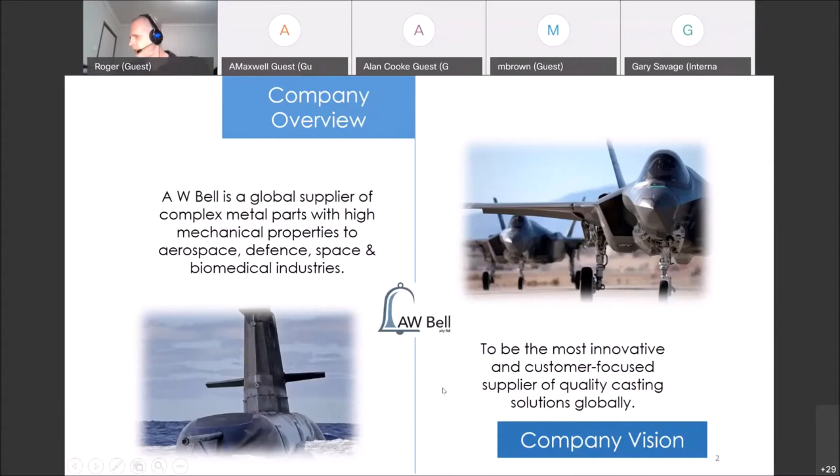So, on to today's presentation. What I'm going to talk to you about, and this is reasonably informal - basically, I'm going to tell you what we've done in this project. It was a very, very interesting project to do, something really quite new for us. At AW Bell we cast everything you can melt in air, so everything from all your non-ferrous materials: cobalt, nickel, cast irons, steels of every description you can possibly think of, but we'd never really looked at anything quite like Invar.

Today I'm going to talk to you about what CubeSats are and why they're important to us, thermal drift of sensors, and why do you choose Invar? Why is Invar important for satellites and for sensors?

I'll talk about the Invar effect, the scope of the project, give a brief overview of investment casting, just in case there's anyone in the audience who doesn't know what investment casting is, because I know this talk was advertised fairly widely. I'll talk a little bit about how thin, ten alloys that we looked at, and some of the reasons why we went down the path we did in looking at different wall thicknesses.

I'll talk about some of the issues we actually did find, especially related to hot tearing. It turns out that hot tearing was one of the major issues that we came up against. I'll show typical microstructures, talk about effect of alloying elements, fluidity testing, and then go on to what we actually did in

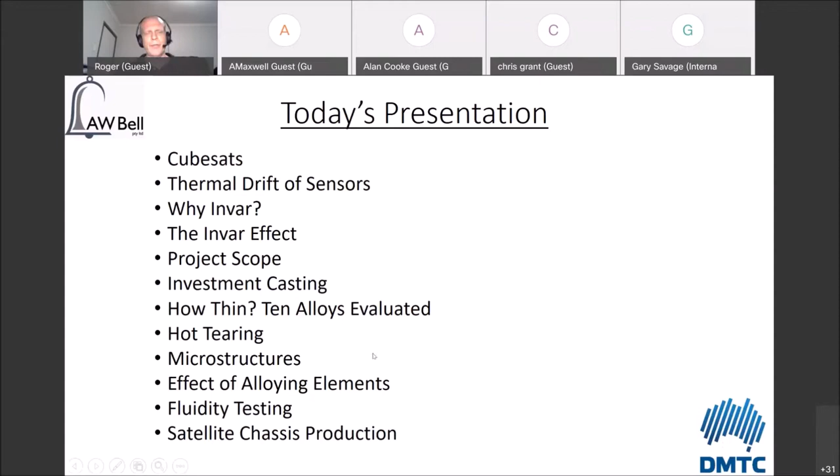the satellite chassis production. So cube satellites. Now, what a cube satellite is, it's defined as being of dimensions that are in multiples of 100 millimeters. So they're quite small. You know, basically you can hold up a ruler like this, a 30 centimeter ruler, 300 millimeter ruler.

That's basically the length dimension of most satellites or cube satellites, and then multiples of 100. So they're called cube satellites because they're cubes of 10 centimeters.

And quite typically, CubeSats can be employed either by themselves or they may be employed in constellations. If they are employed in constellations, it means that you've got a whole lot of them over a very large area, which creates an array. And that's very, very useful if you want to get a really, really good look at everything.

So the cost to build and launch a CubeSat is one of the big attractions to them. Generally, it's considered to be around about $20,000 to build and launch a Cube satellite. Most of that, of course, is associated with the launch part of it. The build of a Cube satellite is actually quite cheap.

With the technology that goes into Cube satellites really taking off at an exponential rate, the small satellite market, that is Cube satellites of around about the dimensions that I mentioned, have a market estimated around about $23 billion globally over the next 10 years. So it's a big emerging marketplace.

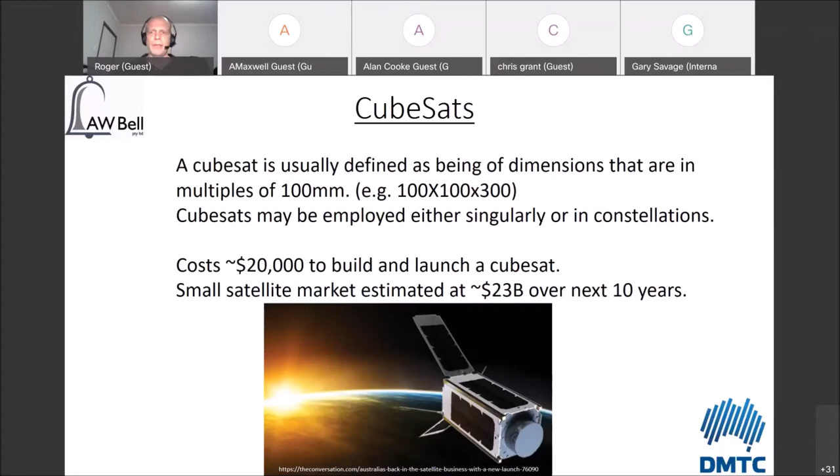And certainly there are a whole lot of different applications for them. We did this work under the Defence Materials Technology Centre because Australian Defence Force were interested in what opportunities might be available to them in looking at satellites, and very small satellites in particular.

So thermal drift of sensors in space is actually quite a significant issue, and it's actually a very, very big topic. I never really realised how much of a big issue it was until I started looking into it. And it really is the case that sensors require very high precision, or they have to be continually adjusted to account for changes in dimensions with temperature.

So the thermal drift is defined as the changes in normal operational behaviour of a device due to changes in ambient temperature. This thermal drift is caused by internal heating of equipment during normal operation or by changes in external ambient temperature.

And really what it comes down to is parts of a satellite face the sun, and they can be operating up around 150 degrees Celsius. Others are facing space, so they can be minus 150 degrees Celsius. It really depends on what the orbit of the satellite is.

Never realised how much of a satellite is actually a cooling system. It's actually quite substantial. So being able to overcome some of the issues with thermal drift means that you can go to these miniaturizations. So the cube satellite model, or what's also called nanosatellites, where you're sort of talking about even smaller, again, sort of this size.

One of the big advantages once you get to the very small sizes, as the price goes down, and you can therefore launch more of them into a constellation scenario.

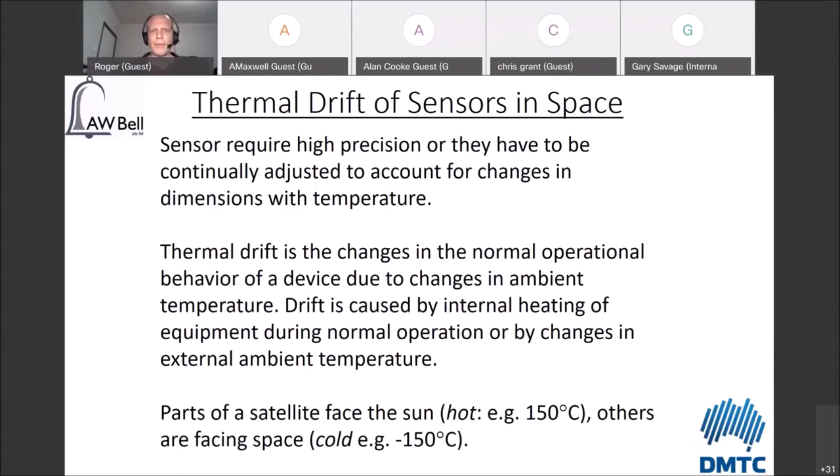So why Invar? Invar is a very, very interesting material. Invar is basically iron with 36% nickel. It has a minimal coefficient of thermal expansion over a very wide temperature range that minimises the thermal drift for sensors and components. Now, it was actually discovered,

invented in 1896 by Charles Edouard Guillaume at the International Bureau of Weights and Measures in Paris. Now, of course, history says that they found it on purpose because they were looking for something that had very, very low coefficient of thermal expansion. But of course, we all know that quite often invention and discovery are not necessarily the same thing.

But one of the things I found about it, even though the material has been around for quite some time, and it is becoming more important today for a range of different applications, the amount of information on actually casting Invar parts was very, very limited. I found continual references to a Metals Handbook from the 1948 edition.

I couldn't find a copy of it. I eventually found one I could buy that was an ex-library book, and it had a small amount of information from that time frame. There was also a small amount from Howmet, published in some Howmet publications in the mid-1980s, specific to investment casting. So there was an extremely small amount of information I could find.

There was some information I got from people I spoke to who had their own experiences with it, but they couldn't share written information with me because of the nature of the projects they worked on. Interestingly, today the major use of cast Invar is in carbon fibre tooling, especially for aerospace products.

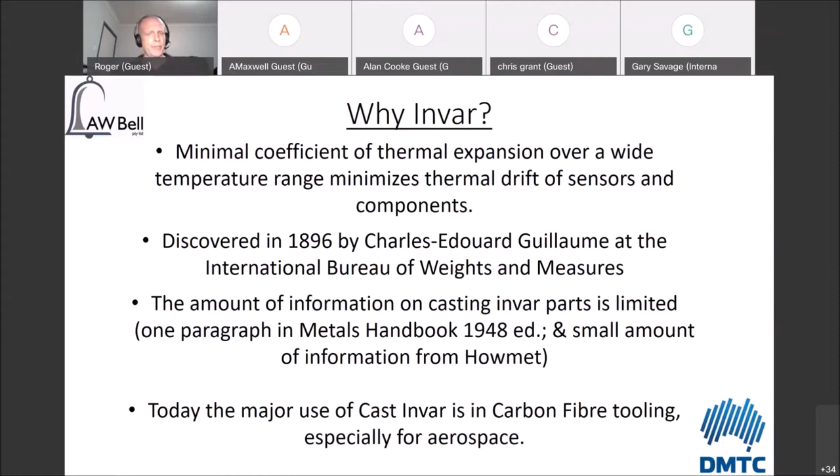This is a picture of machining of Invar for carbon fibre tooling, originating from Coast Composites Incorporated Tooling Division. Coast Composites manufacture wing sections for a vast array of commercial airliners, Boeing, Airbus, and companies all over the world. My understanding is that the big Invar foundries cast these very large pieces, which are then mounted onto a frame that is also Invar. They machine the shape of the wing piece out of it, and that becomes the carbon fibre tooling.

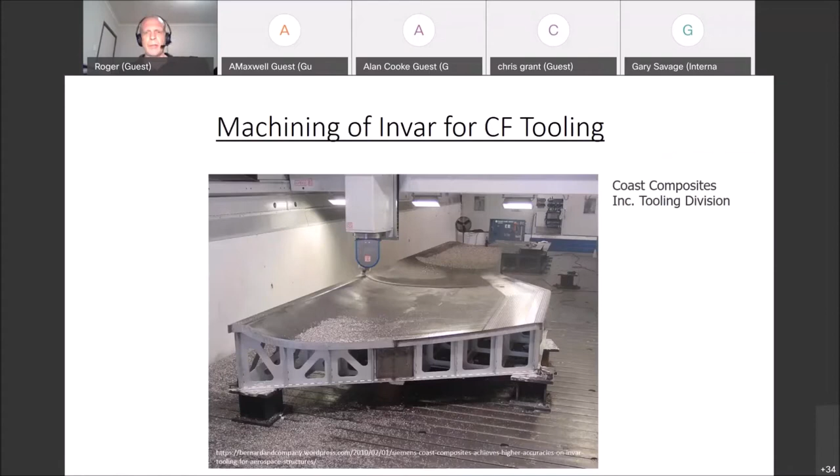The big importance of it is the fact that it doesn't move around with temperature, and that's why it's so desirable for tooling applications. So this puts it in context as to where most of the use of Invar has gone today, and as carbon fibre grows in aerospace, Invar use is growing as well. That's a little bit of an aside, not what I'm talking about, but I wanted to put in context where a lot of the technology currently resides. Boeing has their own specification for this kind of thing, which is a little different, which I'll talk about further on.

It's quite an extraordinary effect. On either side of 36% nickel, you have what tends towards normal coefficient of thermal expansion, but right at this particular concentration, and a little either side of it, you get very low coefficient of thermal expansion. This is more commonly termed the Invar effect. Some other materials display it, but nowhere near as significantly as the iron 36% nickel material.

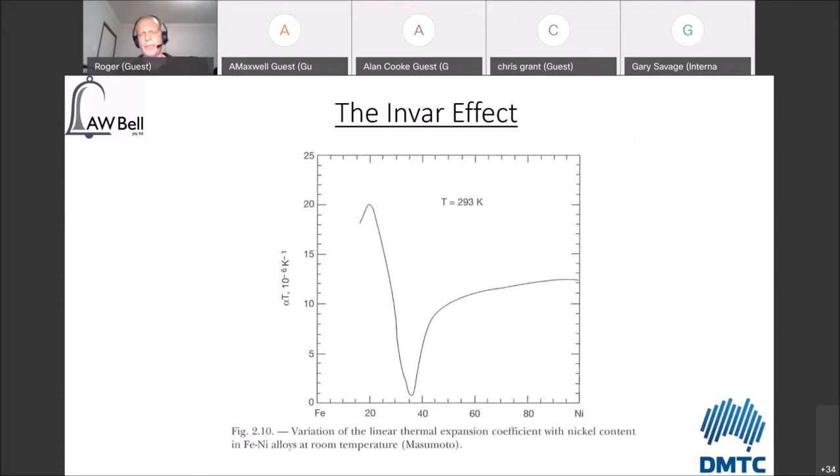So the project scope: this was part of project 11.62 for the high altitude sensor systems, and the greater project name was Advanced Manufacture of CubeSat Components. It was a collaboration between DMTC, who had oversight of what we were doing, University of New South Wales, who provided designs for the structures we built and some of the hardware that went inside, CSIRO, who were looking at 3D printing of some titanium parts which went internally into the structure, La Trobe University, and outside, AW Bell.

Our part of the project was to evaluate the feasibility of manufacturing thin wall Invar from investment castings. We assessed alloys based on their castability, coefficient of thermal expansion, and propensity to form defects, with a particular focus on optimizing the thermal expansion over the temperature range of -150 to +150 Celsius, making it suitable for satellite components.

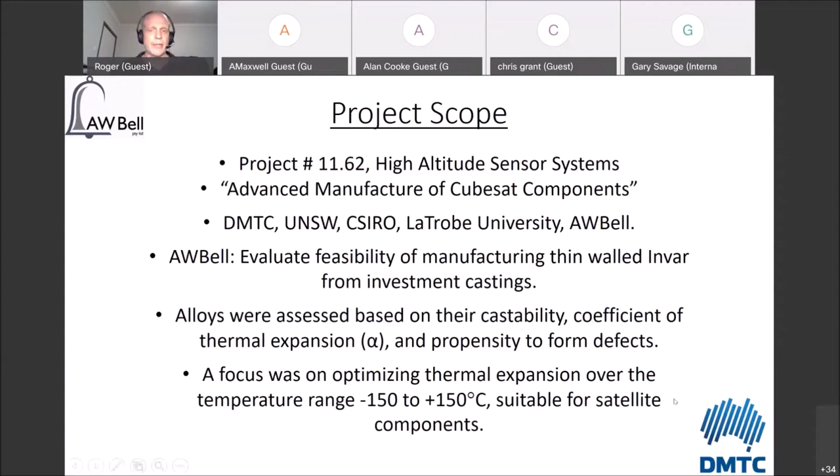So the investment casting process - I won't spend too much time on this since most people here know a little about it. It's essentially the lost wax process: we start with injection of a wax part, take the wax component and put it onto a tree, apply a series of prime coats, backup coats and stucco onto the wax tree, producing a ceramic shell. After the shell is produced, we remove all the wax in an autoclaving process, preheat and fire the shell mold, cast metal into it, and then we have the tree that comes out.

At the end, we knock off the ceramic shell that's left behind, cut off the parts, fettle it, and finish everything.

You can see the steps on the middle picture on the screen here. On the right-hand side are pictures of some actual parts - these are a swirler, not a propeller, they only move air. You can see the model with the wax and the cup on it at the top, then casting it in the middle, and the final part upside down at the bottom.

So it's a reasonably straightforward process. The lost wax process is very, very old, one of the oldest casting methods known to man, but today it has become quite high tech in a lot of the ways that it's used.

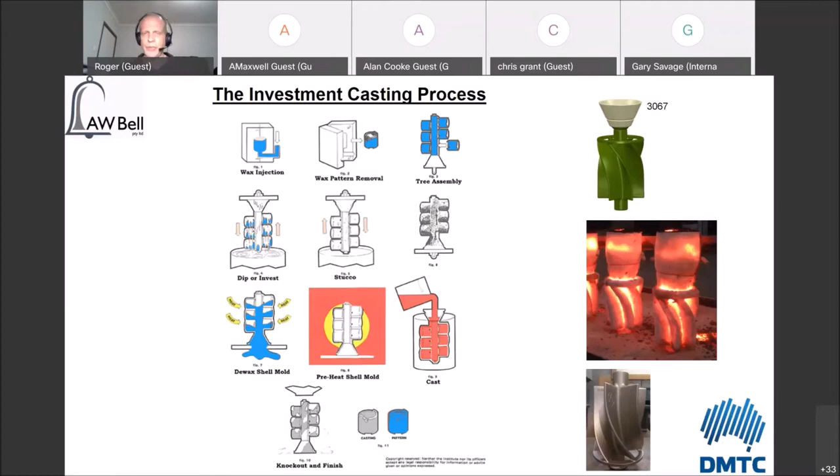Where we started with this project was looking at how thin you could actually go, and what we did was use an SLA printer to print the shapes. So we weren't using wax preforms, we were using SLA plastic preforms. We printed these small boxes, around 10 centimeters by 10 centimeters by 10 centimeters, with 5 different wall thicknesses.

Now, it's not a fantastic design for down sprue, but it had some of the characteristics we wanted to look at. What you have here is wall thicknesses that vary, with the target being between 0.8 and 6.2 millimeters.

We didn't quite get to 0.8 millimeters because when you print at 0.8, it came out a little bit thicker just because things do move around. But we were able to get down to 1 millimeter where we were targeting the very thinnest walls.

You can see the model of the trial parts on the tree in the top left corner, actually on the tree being manufactured in the bottom left, casting in the middle where the shell's been preheated at 1,000 degrees and the metal temperature was 1660. On the right-hand side is one of the finished results.

So what we looked at with this was the influence of carbon, manganese, silicon, chrome, and molybdenum on castability, knowing that carbon, manganese, and silicon all improve thin wall filling. A little bit of chrome was kept in there, mostly for oxidation protection.

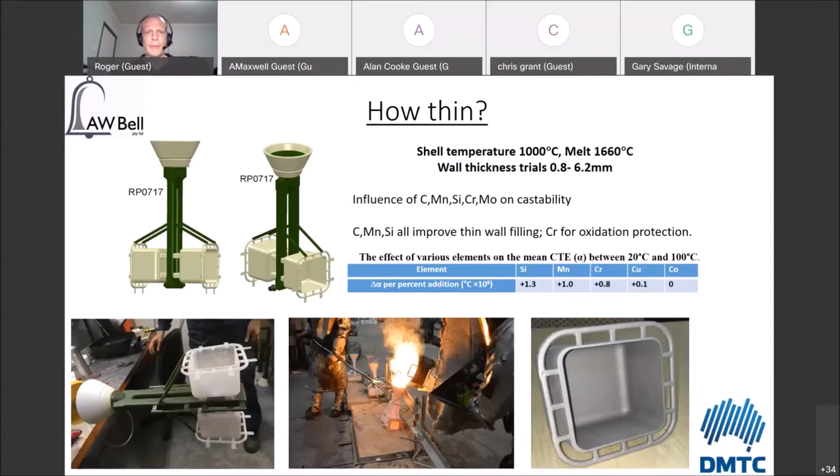So the 10 alloys that were evaluated in the first round of testing, you can see here we maintained between around about close to 35% up to around 36% nickel.

Now these were all air melted as well. The pour temperature was 1660, the shell temperature was 1,000 as already mentioned. What you can see here is the variations that we made.

We had varying carbon contents, silicon contents, manganese contents. We mostly tried to keep the molybdenum and chromium fairly standard.

One of the reasons why we went for the compositions that we did - we found that there was an ISO specification for an Invar type alloy called GX3 nickel 36, which is from ISO specification 19960.

Now the molybdenum in there has some very interesting effects. It doesn't have a very severe effect on some of the other characteristics of the material. So we basically just kept that at a fairly standard level around 0.7 to 0.9%, because moly does have some positive impacts on the outcomes that you achieve.

So this was the starting 10 alloys. At the bottom was a Boeing specification material, which was a wrought version of Invar, provided by Miranda Engineering over in Moorabbin. Miranda do a lot of aerospace products and tooling for carbon fibre, so they were able to supply me with a sample, and I was able to do comparisons against the Boeing specification material, which was really very, very useful.

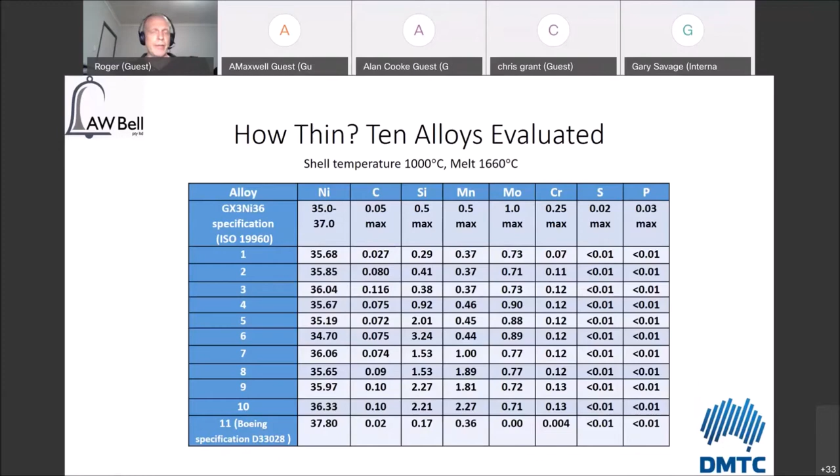So these are the 10 alloys that we manufactured, starting at shell temperature 1000, melt 1660. Basically, we're going down to very, very thin wall thicknesses, so everything's really at the hot end of what you do for investment casting.

The design of experiment was that alloy 1, 2, and 3 would show the effect of carbon. Alloy 2, 4, 5, and 6 would show the effect of silicon. Alloy 7 and 8 would show the effect of manganese when silicon was about 1.5%. Alloy 5, 9, and 10 would show the effect of manganese when silicon was greater than or equal to 2%. And then alloy 11, as already mentioned, was a commercially available wrought Invar according to the Boeing specification.

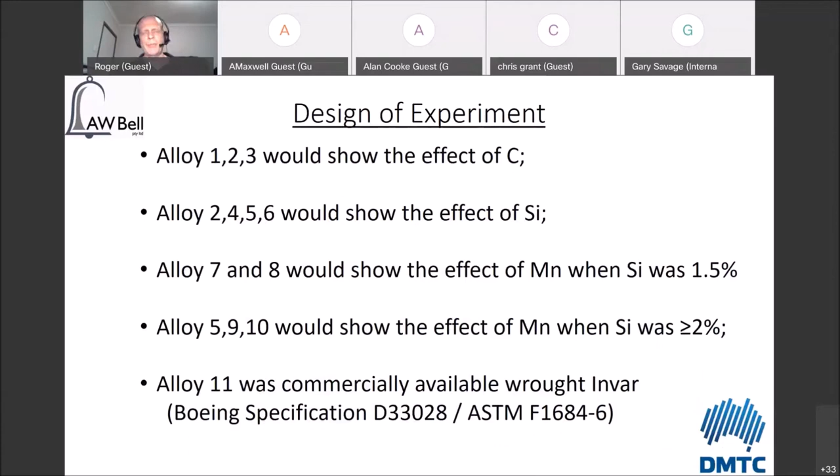One of the things that we found was that in a number of these alloys, hot tearing was a real problem. This particular one is number 6, which was the 9th worst rated one. And you can see the hot tear that runs through the part here.

This has had the shell removed off of it. It's not been sandblasted or shot blasted or anything like that because I wanted to actually capture the hot tears. There's a hot tear over on the left-hand side here, and there's more hot tearing here through on the right-hand side. Now this is the thickest wall, and generally when hot tears did appear, they appeared on the thickest wall.

Of course, there's gates behind them on the 4 corners, so it's no real coincidence that we saw this issue. But generally, when we did see tearing, it was not on the thin walls. It was generally on the thicker sections.

Hot tearing, of course, has a lot of microstructural reasons behind it. But most of all, one of the very important things associated with it is the issue of constraint and where your constraint points are. So a thick wall with fairly heavy constraint points around that area did cause some issues.

But what was really, really nice was that alloys 1, 2, and 3 showed little to no hot tearing at all. And of course, the big positive out of that was that alloy 1 was actually in specification for the ISO alloy and also showed no hot tearing. So that was a really, really nice result to be able to achieve.

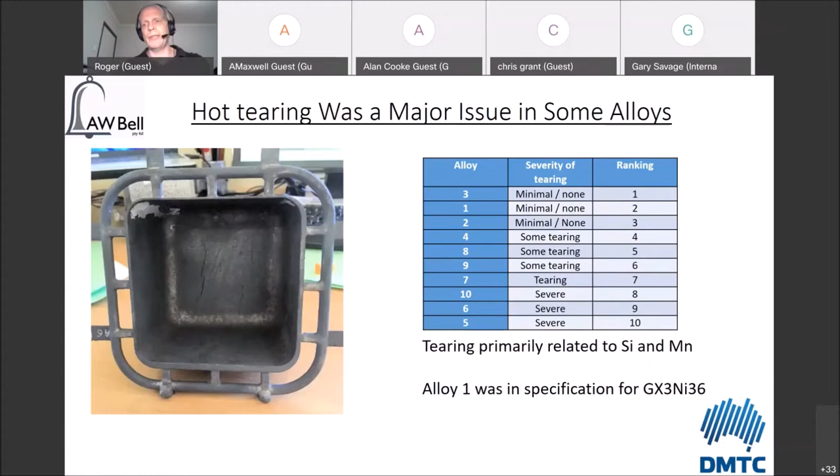Now, just going back to the earlier slide where I talked about the effect of chemistry, if you remember, alloy 1, 2, and 3 were to investigate the role of carbon. So we can also say that the carbon content actually had very minimal effect on the hot tearing. It was the other elements, the silicon and manganese, that were especially problematic for this issue. So we were able to identify pretty quickly that silicon and manganese were the culprits in this issue.

Now, I did mention that not all alloys showed this problem, and this is an example of one of the ones that did not show it. I actually have this part sitting in front of me at the moment, so if anyone wants to have a look at it, I can put it up to the screen later on. We're going to talk about it in a little bit more detail.

The frame around the outside of it that you see here is there purely for structural purposes. It's not there to feed it. Basically, when you are casting down around 1 millimeter in investment castings, you have to be very, very careful that you constrain things so they don't move around too much, or you try to cut stuff off and it starts to bend and move all over the place, and then you have a different problem to deal with. So this ring is only there to stiffen up the outside of it to hold it all in position while we cast it.

So you can see the part there. You have the very thin wall over here around about 1 millimetre, and then the back wall being around about 6 millimetres. So what this did tell us was that we could cast down to these very thin wall thicknesses in this material. But one of the things that we did notice as well, there's an example here, there's a little fin over on the side here where the shell was cracked, and there's another one over here. Basically, wherever there was a shell crack, metal filled it.

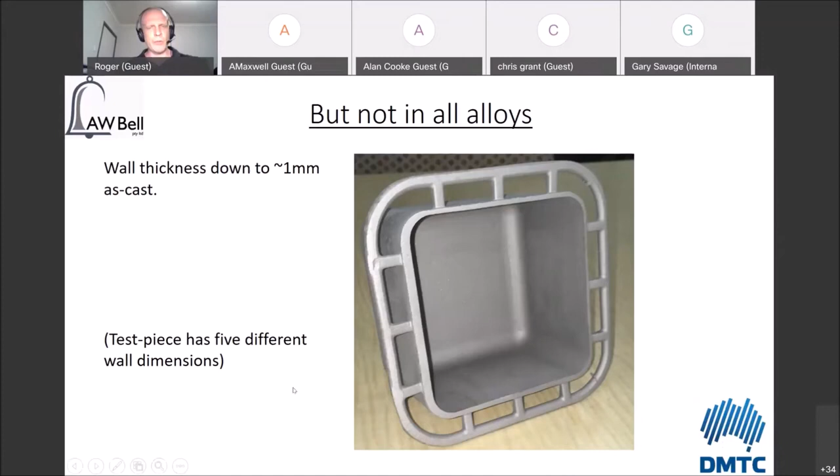At the temperatures we're using, we were actually filling these very fine fins. This did tend to suggest that, well, maybe because we do know we have a problem with hot tearing, maybe we can do something about it and drop our temperatures a bit. So that became a focus of part of the next stage of the experiments.

Now, one of the things that becomes quite clear about Invar is that it does not have a two-phase solid plus liquid range while going through the solidification process. You're going from liquid directly to austenite. So basically, liquid goes to solid in the same way that a pure material does.

This is very interesting because there's a lot that's been written about the mushy zone inside materials and the contribution of mushy zones to tearing. This is a little bit different because we can look at this without that two-phase region. We can say, okay, it starts solidifying and we're only driven by temperature rather than phase. So the outside solidifies first, you have this onion skin effect, much the same way as aluminium bronze does, and then it moves forward to the inside.

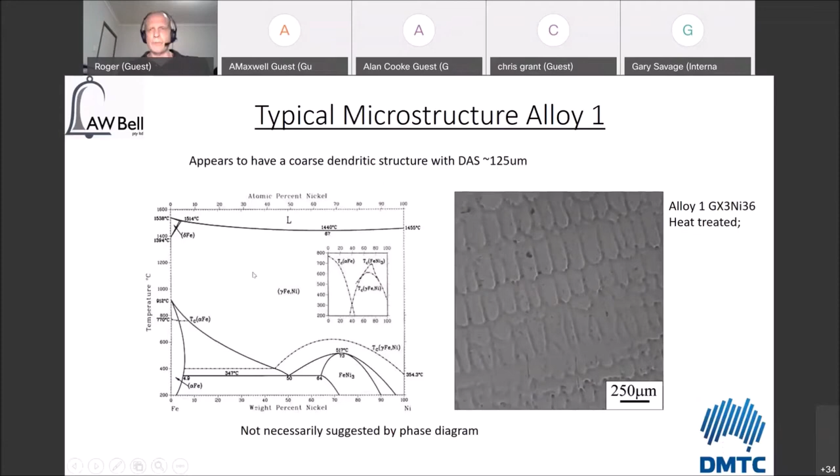And when we look at the thermal analysis of the material, we can see that the thermal arrest is very similar to a pure material.

So the thermal analysis is very consistent with the phase diagram. It tells us a lot about it. It does tell us that we are starting to kick off solidification around about the 1440 to 1445 range, and it stays pretty constant through the thermal arrest until it finishes.

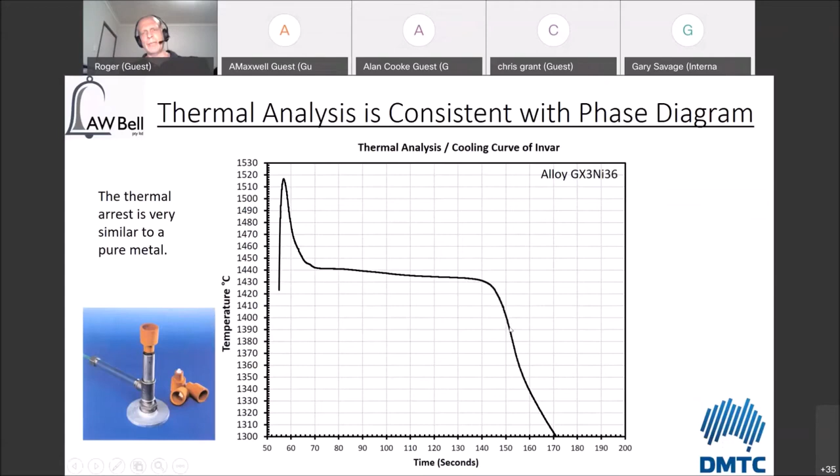Now, depending on how you interpret the tail end of a thermal analysis diagram, you could probably say, well, once it starts getting back to a linearity here is pretty much when you're finishing. So it's not completely flat because it doesn't have a very straight angle on this edge, but it's getting pretty close to behaving like a pure material.

So samples that were cast together with the boxes that I showed you before were heat treated prior to machining and thermal expansion testing. The heat treatment was done in accordance with the ISO standard. The specification here is just straight out of the ISO standard. We chose parameters inside of that, and it's pretty straightforward what you need to do - there's nothing special about it.

And then thermal expansion testing we had done by the Thermophysical Properties Research Laboratory at Purdue University in the States. They're extremely well set up for doing thermal expansion testing, thermal conductivity testing, a whole range of things. Basically all we had to do is machine our samples, and our machine shop did a great job producing the samples for me, and we sent them off and had them tested.

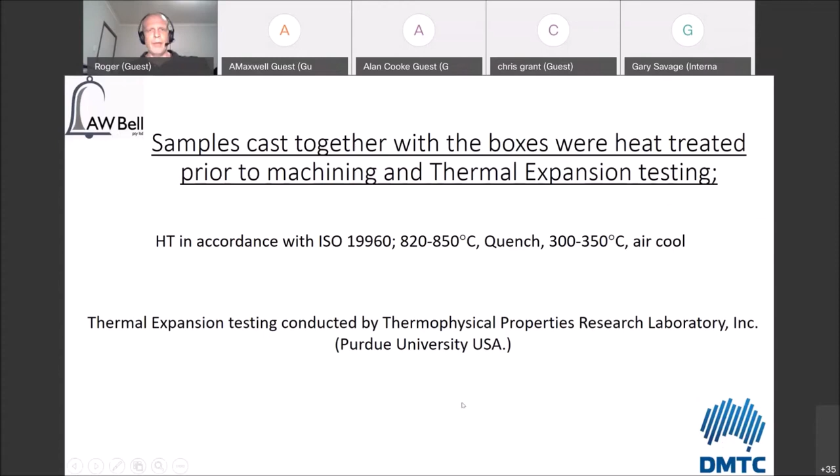One of the things that was perhaps not expected, because all the literature tends to say carbon is a deleterious element here, we actually found that as we went from about 0.02% carbon up to about 0.1% carbon, the result actually got a little bit better. This is not entirely expected, but the results were what they were, and so we saw this slight improvement as carbon went up.

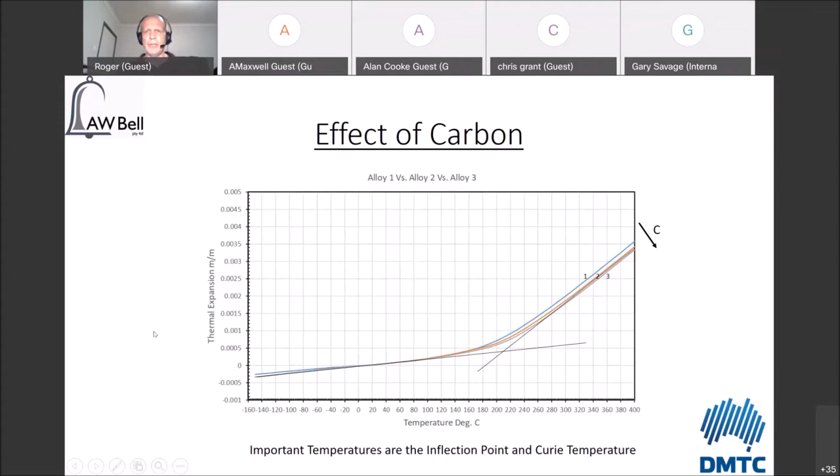Silicon does improve fluidity of the metal, but it doesn't help at all in terms of the thermal expansion coefficient. It also, as I was alluding to before, doesn't help in terms of the hot tearing either. So keeping silicon very, very low is certainly advantageous.

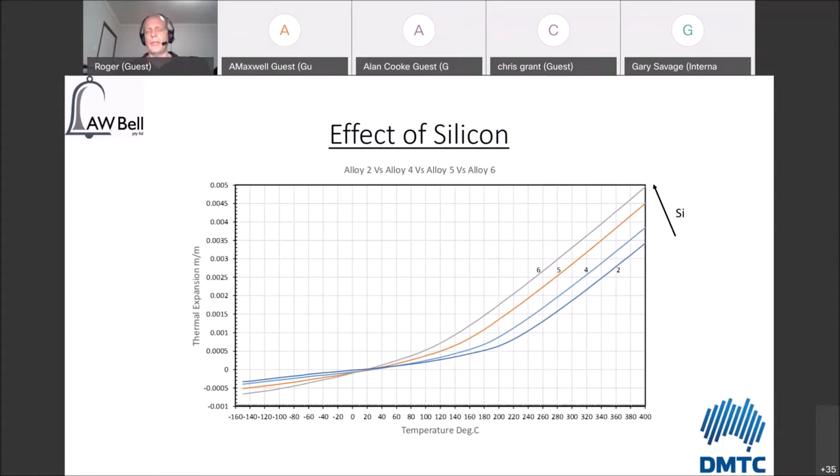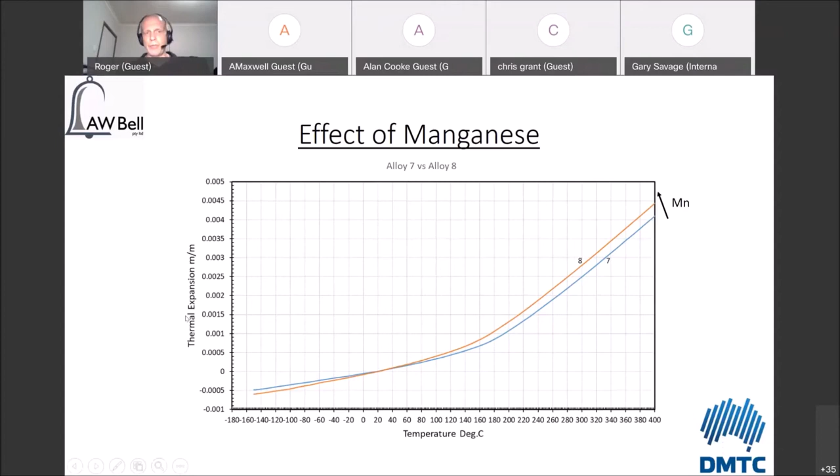And when I say unless you really need to, I'll get to reasons why you might add some of these things back in later on.

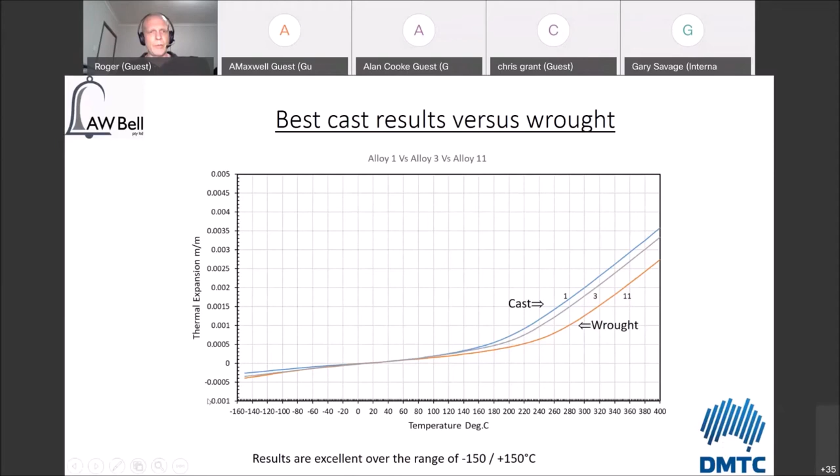because they need to operate over a different temperature range than what we're targeting. So, for example, temperatures up to 250 degrees are very important for what they were looking at in terms of the carbon fiber tooling. Anyway, this is quite an encouraging result for sure.

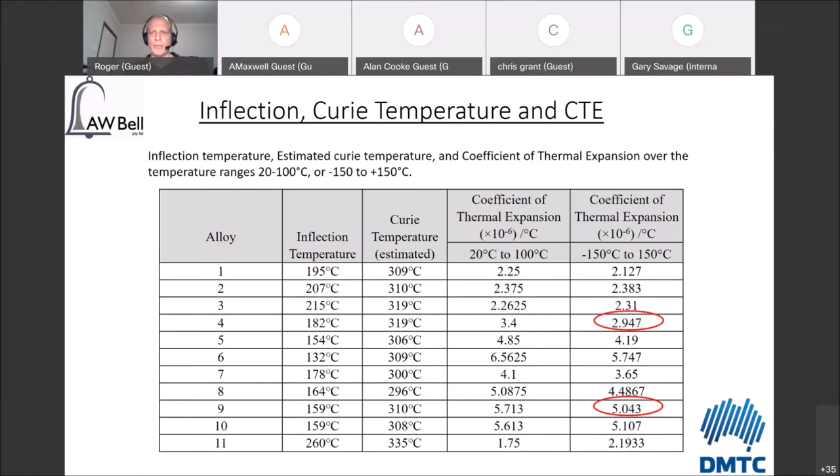Now, why is that important? Well, when you have something with sensors in it, you need windows for the sensors to look out of and go through. So there's quite often a requirement that your window and your material holding the window actually has the same coefficient of thermal expansion. So this tended to suggest to us that, if we didn't need the absolute minimum, we could actually tailor the coefficient of thermal expansion to match the window material quite well if need be. So that was also an interesting outcome.

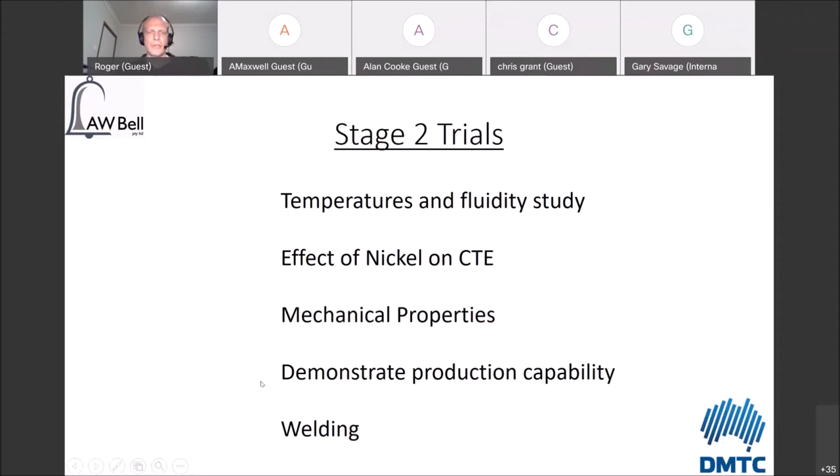So these top 4 are the ones that I'll continue talking about right away. Fluidity was a major unknown - we knew that we had to have high fluidity to get to these very thin wall thicknesses, but we had this issue with hot tearing, so we had to go as cold as possible to achieve good fluidity.

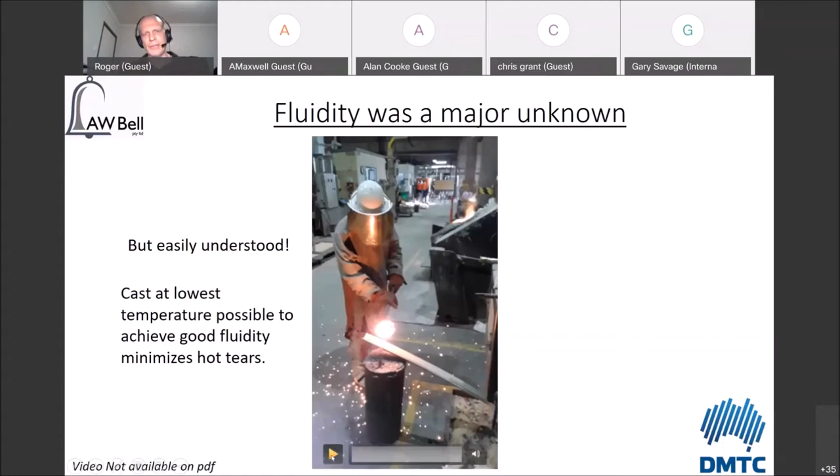That's what we're set up for here. That's actually a cinder pig from one of our furnaces with a bit of rebar on top of it, and then we have the angle iron here. As long as you don't move the angle iron, your results are comparable. There's nothing particularly quantitative about doing this, but it's very, very cheap and easy to do - it costs you nothing to set up, and you get a good result. So I did video this, so you get some idea about what's being done.

Okay, so that's about 5 seconds in that one - it took to run down there. Now just run it again. You need to watch the metal as it's running down. And it's very, very fast the way it goes down the angle.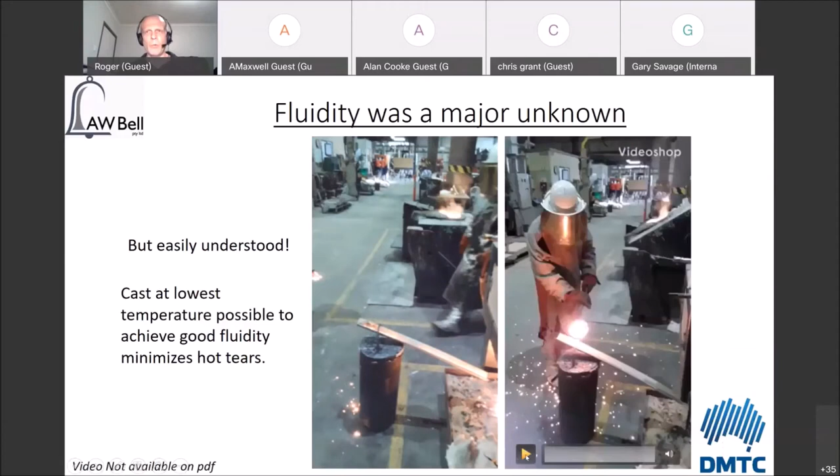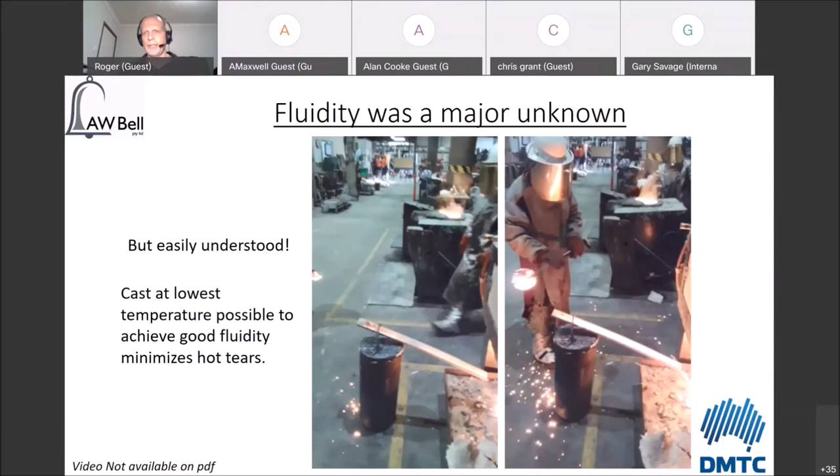Now, if I take that to about 1/3 the speed, so you slow it right down, you get a completely different view of what it's doing, and you also get a feel for how fast it's actually traveling. Basically, it's moving incredibly quickly under these conditions. So using this test, you're able to get a very good feel for whether my material is likely to fill my mold or not.

So what you do with this test is run it at different temperatures, and you can see the different temperatures that were examined here - between 1520, 1540, 1560, and 1590 degrees Celsius. You take the piece off and measure it, put a tape measure against it and get a measurement. You start to see that at 1520 it flowed about halfway down, 1540 went most of the way down, and 1560 and 1590 are fairly similar.

But then when you actually look at the characteristics of the material, you can see that the one at 1560 is pretty chunky. The one at 1590 was almost like foil - it just ran incredibly quickly, and this is the one that was shown in the video running so fast. So whereas our initial estimate was at 1660 degrees Celsius, we actually found that by doing this, we could drop down to 1590 and still get extremely high fluidity in the material. Now this was a little bit unexpected because I thought, well, this is iron and nickel, not much else - I didn't really expect it to have this very high fluidity.

There are some reasons for this that I'm not going to talk about tonight, but at the end of the day, we were able to achieve an incredibly high fluidity at a melt temperature of 1590 degrees. So being able to reduce the temperature by 70 degrees Celsius meant that we were able to minimize the risk of hot tearing when we started to go to more complex structures.

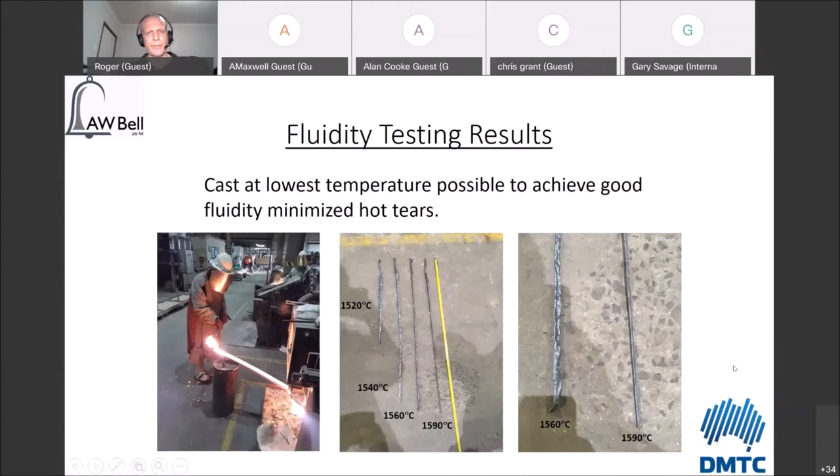So the effect of nickel was looked at next, and we were looking at a number of different alloys here - 6 different materials were looked at, where we were looking at nickel contents up to around 40%, keeping everything else pretty constant. And again, this is still air melting - nothing done in vacuum or anything like that, using argon purge through melting.

So here we have alloy 16, around 40% nickel, maintaining around 36% in a few of these materials, and around 37 to 38% in some of them as well. Carbon was kept around 0.02 as well as we could, silicon kept pretty low, manganese kept below a sensible level, and the moly's still in there, with a little bit of chrome as mentioned earlier. Sulfur, of course, very, very low, and phosphorus very low as well.

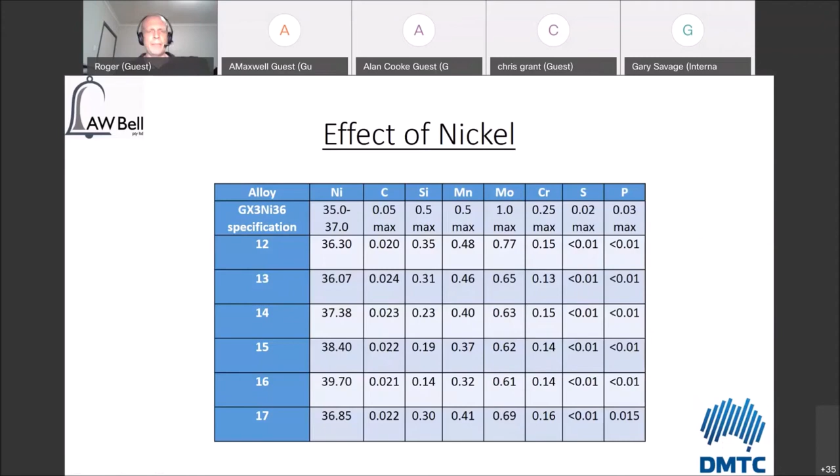So these are the different trials that ran through to look at the effect of nickel, and this summarizes the result very, very nicely.

So as we go up in nickel content, we're going from the green curve to the red curve to the blue curve, which is completely in line with what we saw for the wrought material. Now, the green curve is very similar to alloy 1. It is actually in specification for the alloy 1 I showed you earlier, the GX3 nickel 36 material, and the blue one is not that different from the Boeing specification. So you see exactly the same trend.

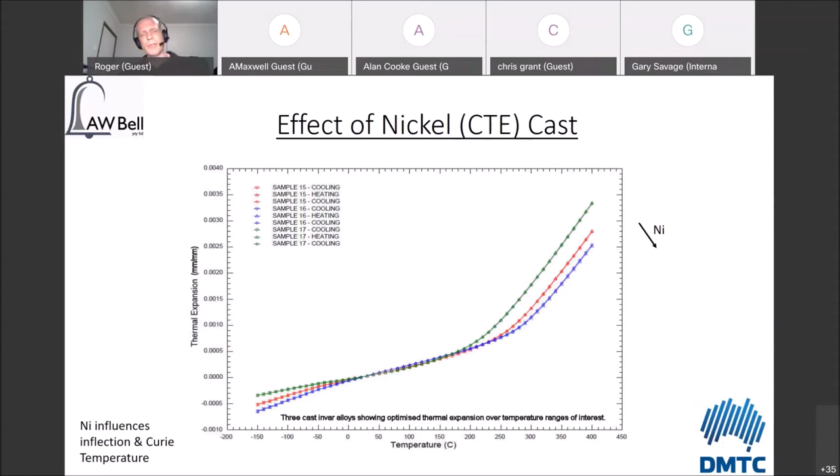Able to prove out that yes, nickel does influence the curve in this way. But the interesting thing is that the red and blue curve here would go very, very close to meeting the specification for the Boeing tooling as well. So that was a very interesting outcome to be able to achieve.

Now, mechanical properties, this is the average tensile properties of the Invar containing the different levels of nickel. They're all basically the same. I wouldn't say there's any great variation here. Generally for Invar, you're going to see around about 280 to 300 megapascals proof strength, around 400 to 430 megapascals tensile strength, and around about 30 to 40% elongation.

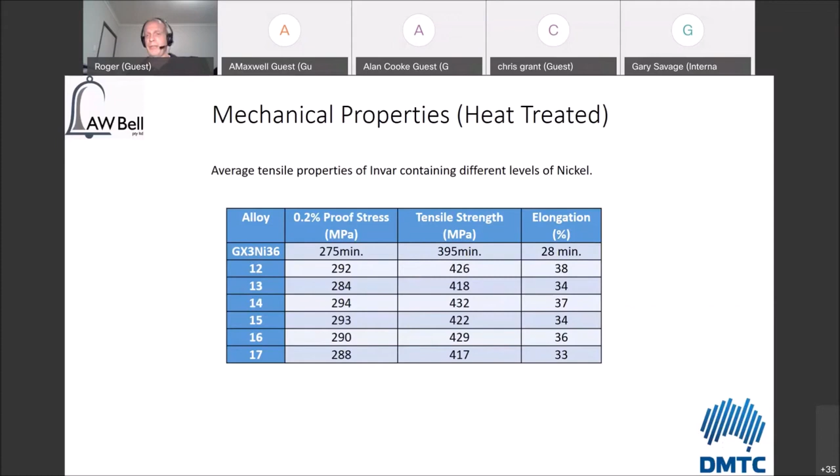Now, for those of us who work in aluminium, we're not always used to seeing very high elongations around 30 to 40%. But sure enough, if you can achieve these kinds of low strength values, you do get this sort of high elongation. And I would say if you plan on manufacturing Invar at all, the fact that it's got these tensile properties makes cutting with abrasive wheels very, very tricky. It tends to glue up your abrasive wheels very quickly, and things get pretty warm pretty quickly.

So the chassis production - this was the CAD that we were provided with, the CAD file that University of New South Wales passed on to us. Now, not all of these features were structurally important, but they were there basically because they said, well, you want to be able to cast complex things at thin wall thicknesses, so here it is. In particular, these crosses, the sections through the middle here, were 1 millimeter. And the pathways to get metal to those were not particularly great.

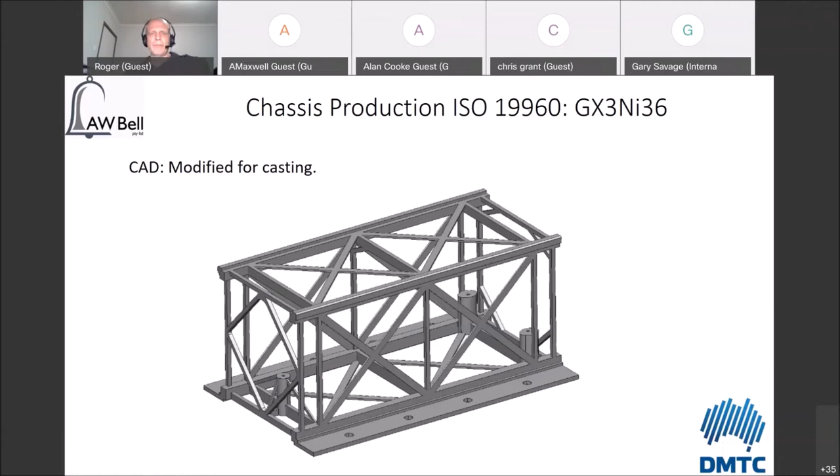So it was a very complex casting to be able to make. So we went down the path of starting with the CAD file, and building these on our SLA printer. Now, an SLA printer is a 3D printing method where you're building up the part layer by layer, and you come out with a plastic part at the end, which you then clean up and prepare.

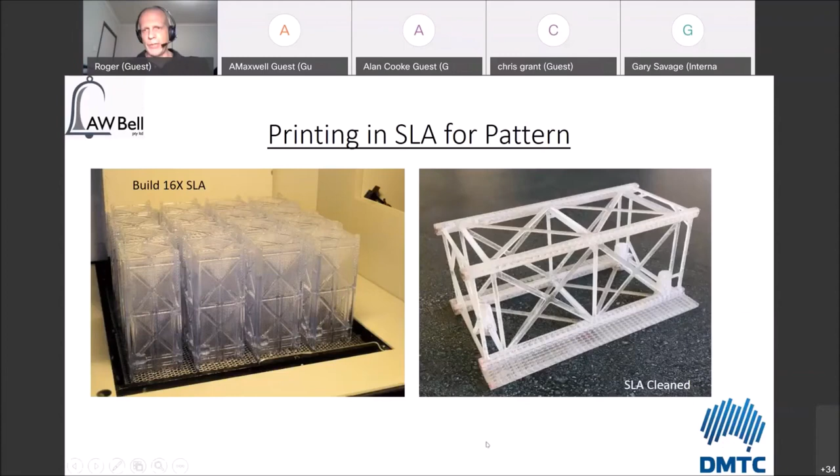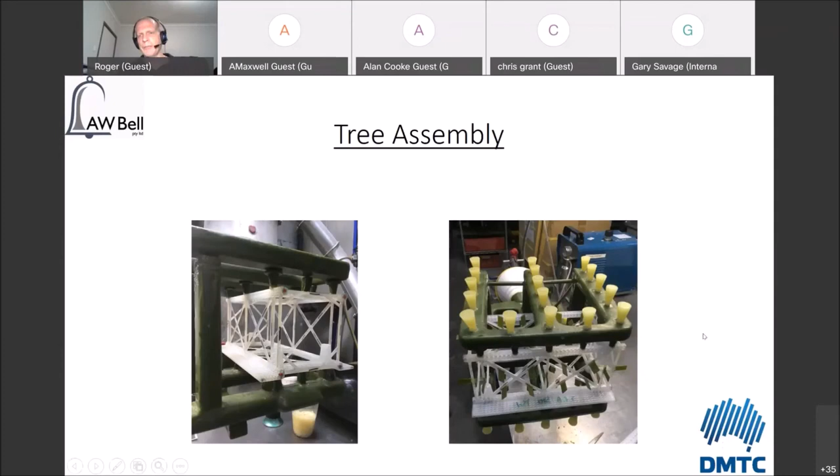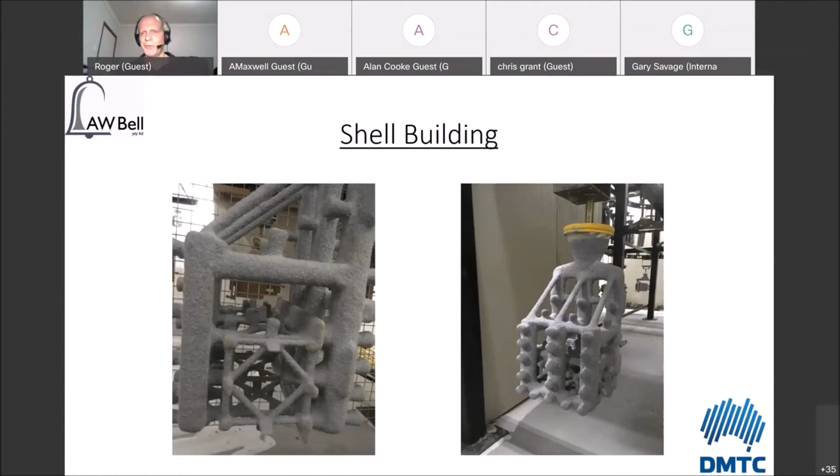So this is the shell being built, and it's going through the drying process here on the hangers while it's being dipped and dried. On the left-hand side, you can see it's building up—that's after probably 2 or 3 coats. On the right-hand side, getting close to the end of the process of putting on the backup coats on the ceramic shell, so this is starting to get close to the final stage of actually making it.

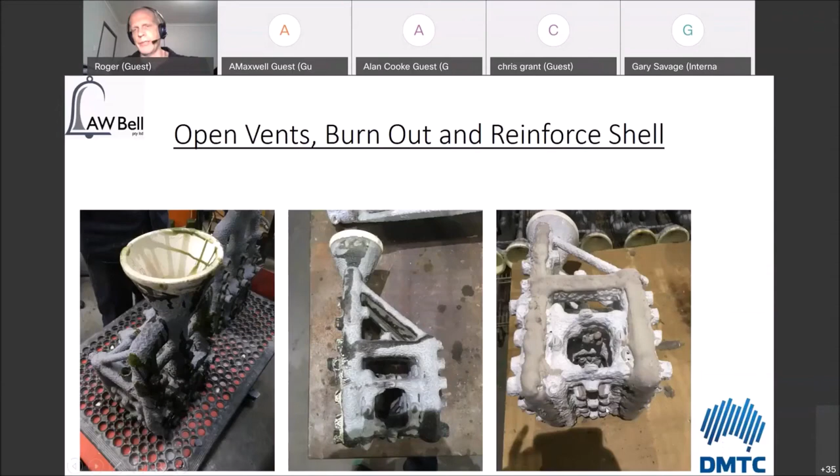So the shell is then preheated. You prepare your metal and cast it. All of this part of it now becomes pretty routine, pretty straightforward.

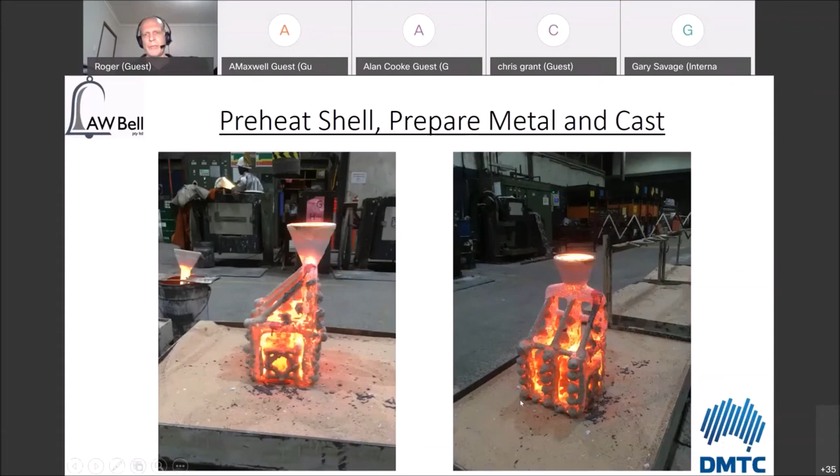So you can see it end-on here and then side-on here, very similar to what you saw in the wax stage earlier. At this point it's been cast and is ready to be cooled down and have its shell removed.

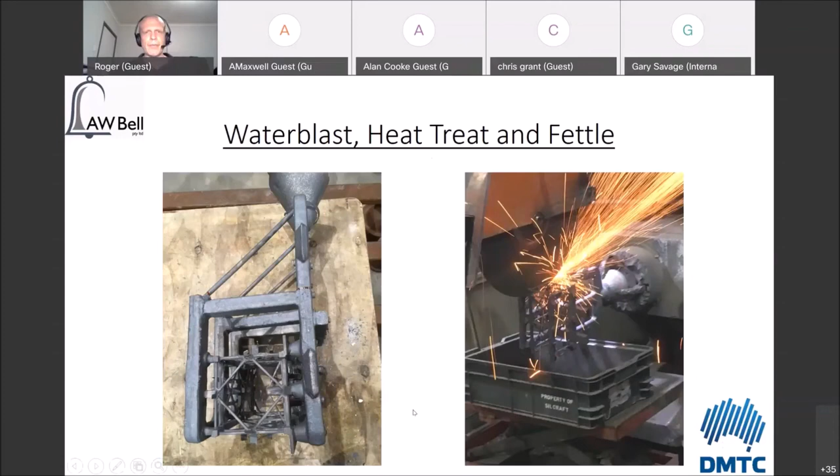We had to learn how to machine this material as well—it is very, very gummy, a lot like very soft 316 stainless. You tend to form very gummy chips, so you have to be very careful while doing it because of that.

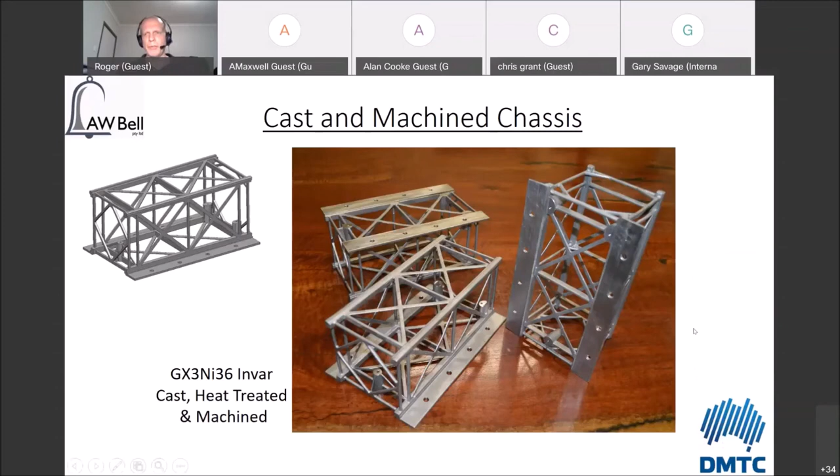And you can see, when the proof's in the pudding, I still have one of them here. So this is the Invar casting, which is the same as the one you see in the picture.

But that gives you some idea of what we're looking at there. So in conclusion, Invar may be successfully cast using standard air melting techniques. The material is particularly sensitive to the presence of silicon and manganese, which contributes to hot tearing. The alloys are surprisingly less sensitive to increases in carbon content. We found that nickel offsets the inflection point and Curie temperature to higher values, but does not necessarily impact the castability.

The thermal expansion may be tailored to match window materials such as borosilicate glass or sapphire. Although we haven't been asked to do that at this stage, we did find that to be feasible. The material has quite an extraordinary fluidity, and you can achieve wall thicknesses down to around 1 millimeter in an investment casting.

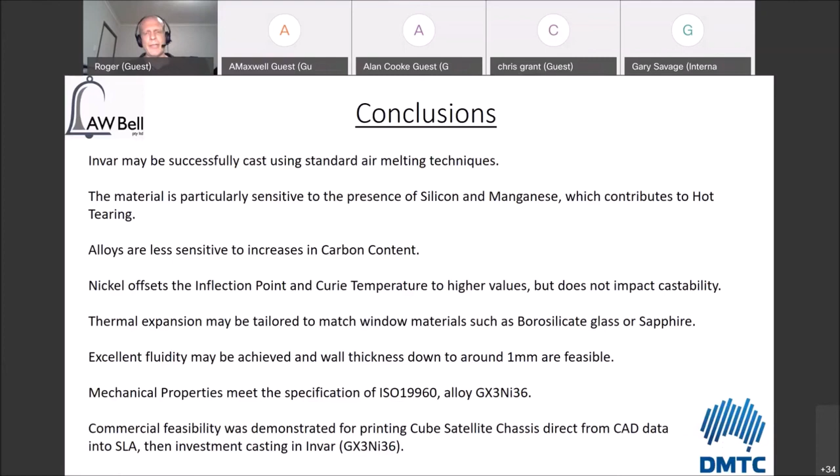All of the mechanical properties we looked at for the different nickel specifications met the requirements of the ISO standard for the alloy GX3 Nickel 36. And we were able to demonstrate commercial feasibility for printing cube satellite chassis direct from CAD data into SLA, and then investment casting these into Invar.

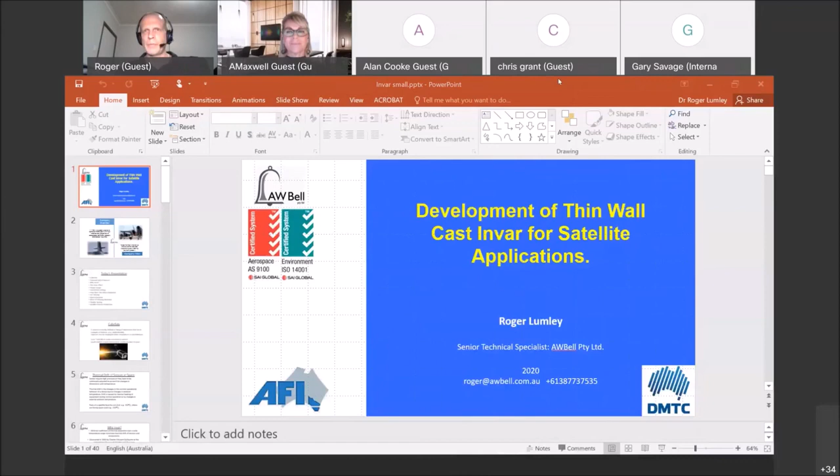Somebody's asked, why choose SLA? Well, SLA was chosen because this has been pretty much a standard product for investment casting for some time. SLA has been the material of choice for 3D printing methods going back quite a while. Our SLA machine probably goes back to around 2010 or thereabouts. Before that, we were using other methods like FDM and wax printing. SLA gives you very good surface finish, around 0.1 millimeter in terms of the ripple size on the surface, and gives you very good structural stability in holding the shell together as well.

We have been trying some other materials - you can use some other plastics. They're not too bad, but generally SLA is extremely good for a production facility when you're making one or two at a time.

Thank you, Roger. Sam's asked which welding process is commonly used for Invar. It's generally TIG - it's quite easy to TIG weld.

Easy to get the filler material or anything like that? You have to buy the right filler material. I've got a supplier in California who can get me almost anything I want for filler material, so I asked him for it and he found it and was able to get it to me before I needed it. So it was all good.